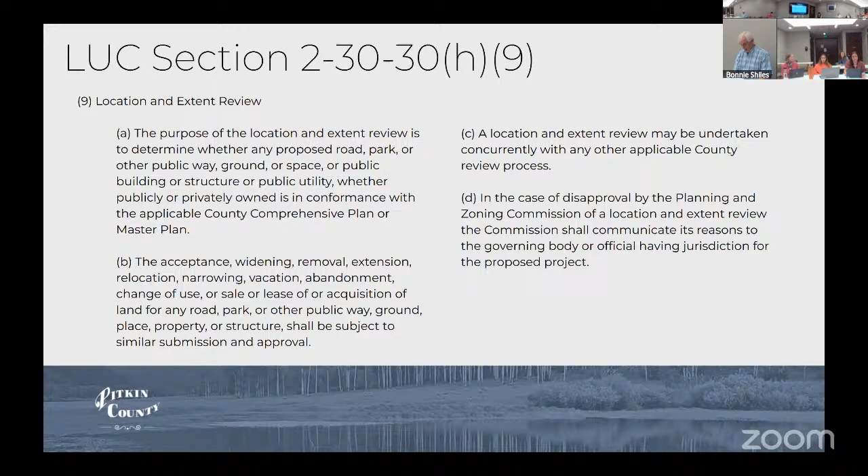The applicable master plan for this case is the Crystal River Valley Master Plan from 2016. The only other thing to note is it is exempt from Chapter 12 of the Land Use Code, areas and activities of state interest, because the applicant is Open Space and Trails in Pitkin County. Looking at the specific code section, 9A, determining whether any proposed road, park, public way, ground, or space is in conformance with the master plan, which is again the 2016 Crystal River Valley Plan.

And then looking at where the parcels of activity are going to be, there's 3 subject parcels. There's the Penny Hot Springs parcel, which is a small parcel encompassing parts of the Riverside, Riverside access and parts of the Hot Springs pools. There's the Filoha Meadows Hot Springs Ranch parcel, which is a very large parcel that partially encompasses the river and some of the pools and then extends out from Highway 133.

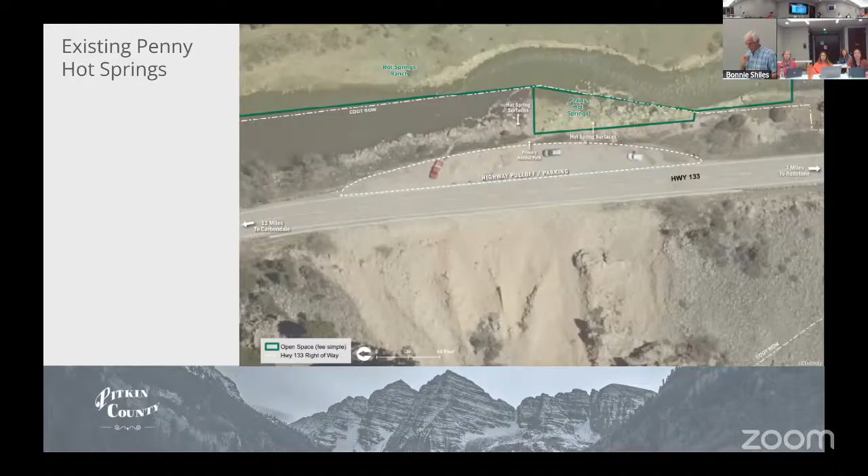And then where a majority of the work is going to be occurring is within a CDOT right of way, which is managed by Pitkin County per a lease agreement. And that contains the parking lot and extends out towards the hot springs a little bit, which we'll look at. So this is the existing Penny Hot Springs. You can see that is the small Penny Hot Springs parcel containing the pools and some of the access.

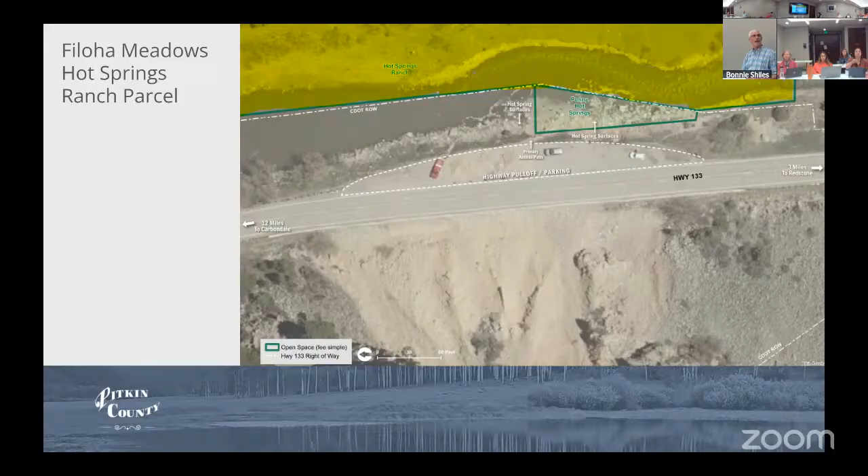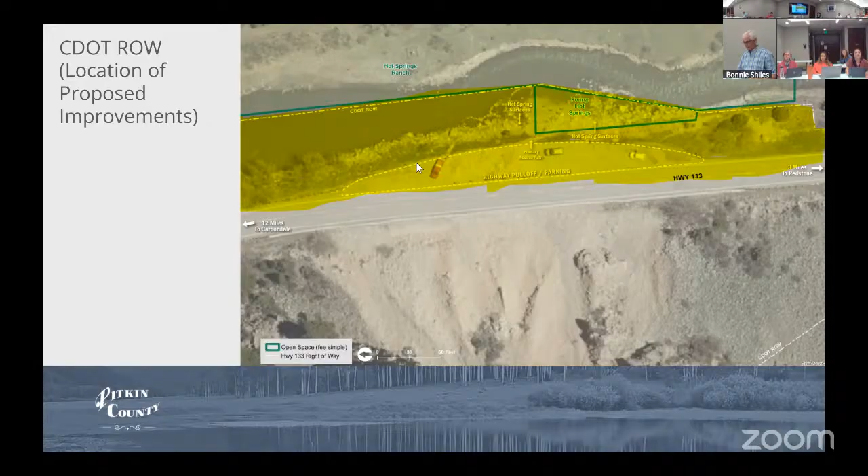This is the part of the Filoha Meadows Hot Springs Ranch parcel. And then it continues to extend out from Highway 133 into that open space. And then the CDOT right of way depicted here is where all of the work is going to be occurring. And you can see that that contains the parking and extends out from there. I'm going to give a brief project summary and then go into the compliance with the master plan, but a majority of the design Carly will cover.

So looking at this project, it is parking, drainage, and access. So the existing parking lot is going to be realigned and resurfaced, retaining about the same parking spaces, 19 out of 21 existing spaces. And then the edge is also going to be set back from the top of the slope with a split rail fence and vegetation. And you can kind of see, with my mouse up here, that's looking up at the current top of slope from the hot springs pools. So the parking is going to be pulled back off of where it's kind of eroding away from the edge right there.

There's 2 existing public access trails that are going to be improved. Measures are going to be taken around these paths and around the eroding slope of the riverside to control the erosion that's happening there, that you can also kind of see in that photo. And then this also does show an existing trail that has come through either erosion or use over time, and all of these existing social trails that aren't formally maintained will be revegetated. And then there's also a planned curb and gutter that's going to direct stormwater runoff and allow for water infiltration prior to meeting the Crystal River, and all native vegetation will be preserved where feasible.

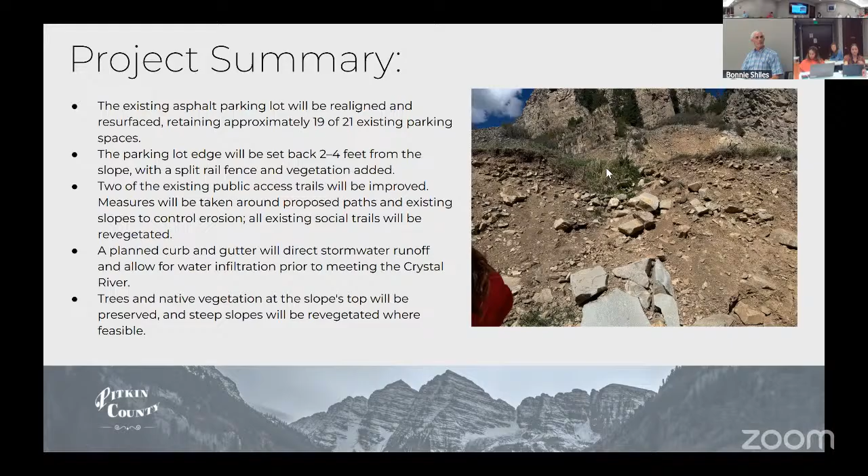So kind of looking at what that'll look like, which Carly will dive into, just to give you an idea. You can see these are the 2 paths right here. This is the curb and gutter that I was referring to that would let out into the river right here. And then the parking lot changes right here. But Carly will dive into that deeper.

So getting into staff analysis relating to the Crystal River Valley Master Plan. This master plan contains primarily core values, goals, and strategies that match up with the values. So to start out, this is pulled from the introduction, stating the overall goal of the plan. It states that the valley is first and foremost a place where preservation of the natural environment and the protection of rural character is valued. And specifically, they call out down here that they value the preservation of open space, wildlife habitat, the Highway 133 scenic corridor, and water quality in the Crystal River Valley.

And then going into some of the goals and strategies that the project aligns with. This is pulled from section 5, environment and open space. There's a goal for future development projects to be sensitive to the unique landscape, physical features, and view sheds that define the Crystal River Valley. And then the promotion of environmental ethic, protecting wildlife habitat, air, and water quality. Looking at the project itself, improvements, specifically the access trails, are going to be form fit to the existing topography in order to minimize disturbance of that already eroding and unstable slope side.

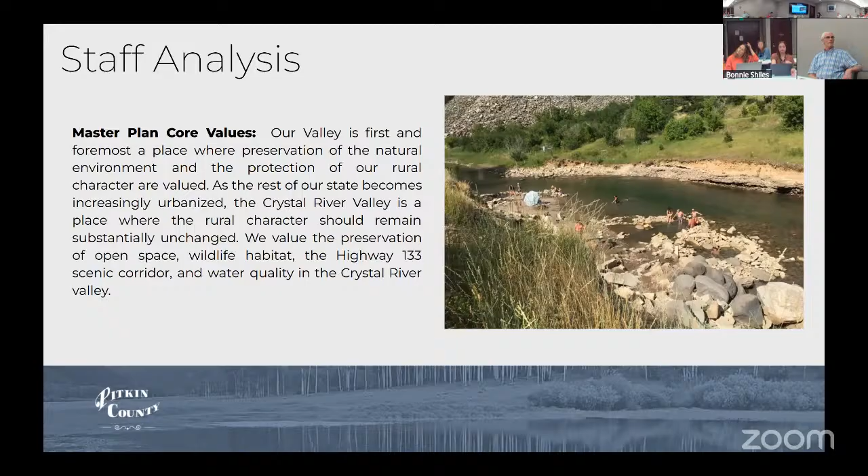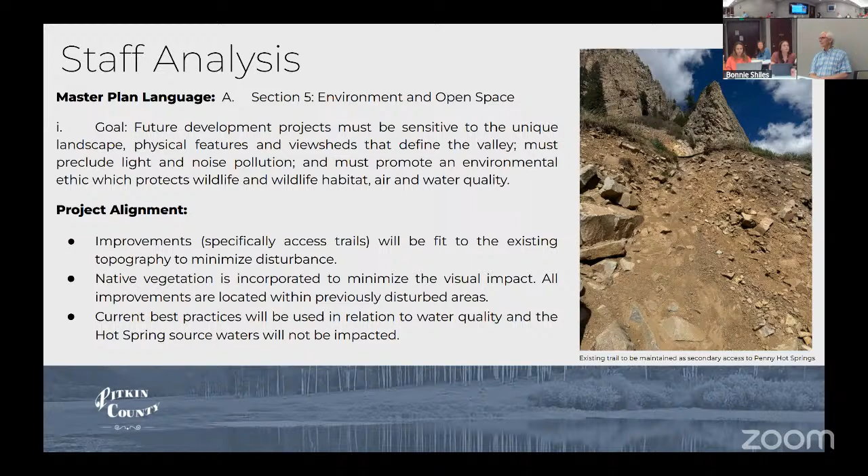Native vegetation is incorporated to minimize the visual impact both from Highway 133 and from the hot springs pools themselves. And then as you saw in this imagery, all of the proposed improvements are within a previously disturbed footprint around Penny Hot Springs. And then current best practices are going to be used in relation to water quality and hot spring source waters. I believe the hot spring source waters have been surveyed, and those will be avoided in terms of machinery and things like that.

But this project does focus on the protection and preservation of the Penny Hot Springs itself while enhancing the safe access for the passive recreational use that it does serve already. And then looking at the balance of environmental protection with that, the drainage improvements are gonna decrease runoff over the current parking lot. Currently, there's no drainage improvements in the area, so water runs off from the parking lot directly down into the pools. So this will hopefully have a positive impact on both the erosion and the water quality of those pools, and balances the need for environmental protection and the preservation of this compatible public use.

And then from the master plan again, section 5 talks about recreation, objectives, and implementing measures. And one of the measures they have is to preserve access to recreational areas that meet the needs of the Crystal River Valley planning area. And so I kind of called out the 2 formalized safe access trails that will preserve use to the area while hopefully having a positive impact on the slope and not further damaging that aspect of things.

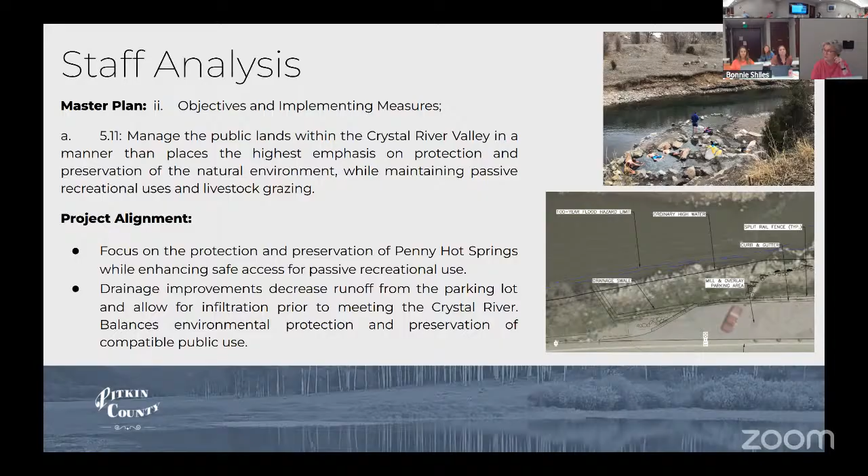Thank you, John. See.

And then looking again at the master plan, section 7 talks about transportation objectives and implementing measures, and we pulled the need to identify specific locations and options for improving pedestrian safety and highway improvements within the Crystal River Valley planning area. And so this is a photo that kind of shows you as well how close the parking lot goes to the edge currently and where that would be taken back from the top of slope. And that really does prioritize user safety with the adequate backup space provided and the increased setback from top of slope with the split rail fence and vegetation installed there.

And then last of this, I'm sorry. I think it's just easier if I jump in with the picture you just had up. Yeah, go ahead. Can you go back to the prior slide, please? Okay, yes, this one. Yeah. One of my concerns was whether the cars will have to back out into the 133 corridor when they're backing out, if the rail is placed further from the edge.

And I noticed in that picture, I think that's a Pitkin County vehicle, one of y'all's when you wanted to take this picture. And the way you parked was slanted, which is the way I parked when I went out there too, so that I wouldn't have to back straight out. But currently I have the parking straight out. I just want to look after the commingling of backing out into pretty high-speed traffic.

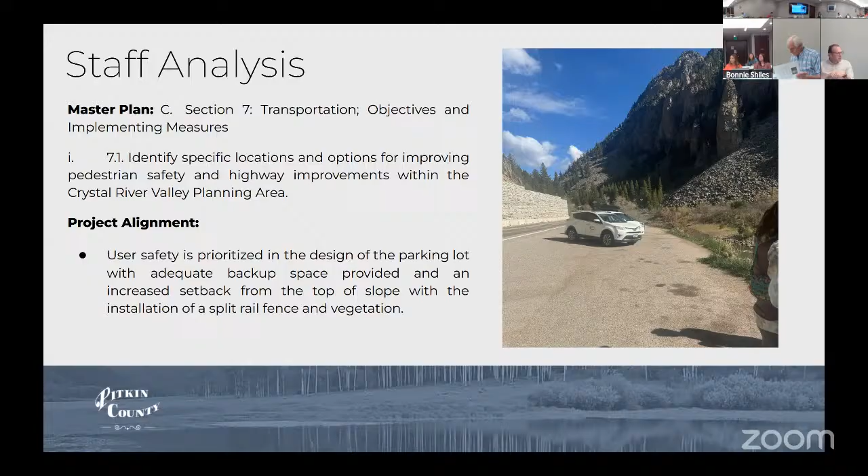Mhm. It's downgraded to 45 through there, but I've seen people just, they want to either get out or they want to get home, and that's a place they can go pretty fast through. And there's some curves. I can touch on that in the slides that I have. Thank you. Perfect.

And then looking at the referral comments that we got on this project, we received 6 comments from the zoning officer, planning engineer, public works engineer, Healthy Rivers and Streams, Colorado Geological Survey, and Carbondale Rural Fire Protection District. They're all included in the packet, but I'm gonna touch on the ones that resulted in something in the reso, and then I think Carly's also gonna touch on some of the other referral comments.

But from the county engineer, we have the requirement of a floodplain permit and statement of no rise, which I believe Open Space and Trails has ready to provide, and then also documentation of permits and/or permission from CDOT for all of the work that's gonna be occurring in the right of way.

And then from Colorado Geological Survey, they called for a site-specific geologic hazard evaluation to assess slope stability, stream bank conditions, subsurface characteristics, and the potential effects of construction on the hillside and river corridor. So that has been included as a condition of approval in the resolution.

And then something to call out here as well, the letter of no rise with supporting modeling is not currently included in the resolution, but it will be added to the resolution.

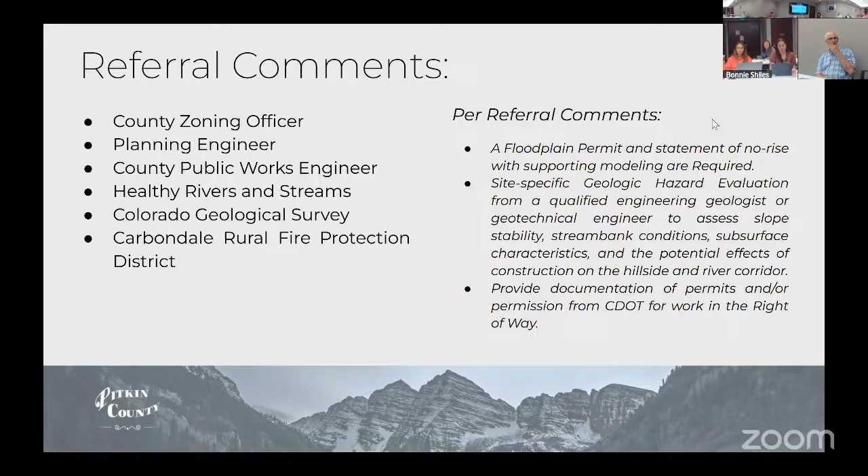And with that, staff recommends the Planning and Zoning Commission find that location and extent review for Penny Hot Springs parking, drainage, and access improvements is in conformance with the objectives of the 2016 Crystal River Valley Master Plan, subject to the draft resolution. Thank you.

Great. Thank you, Rebecca. Carly? All right, let me share my screen here. I have a question. Can I start with my questions?

Yeah. The referral comment from Colorado Geological Survey that requires an evaluation, how will you handle the response of their evaluation if it hasn't been done yet? Like, what is the process for them giving feedback from a full evaluation and further research and then incorporating that into this plan that we're looking at now? That is a question that I have.

Hello, I'm Carly O'Connell. I work over in Pitkin County Open Space and Trails. I'm the landscape architect and planner there, so I've been managing this project. Again, my landscape architecture title precludes me from designing walls or slope stability analyses, but from the outset, we have worked with our engineer on that question, and it was determined that a slope stability analysis was not needed for this project. So we did not pursue one.

And I think, as Carly said, if there's a further investigation related to stability that turns this into something other than this, the first place for that to go is back to the open space board to determine if it's even a project they're going to pursue. This kind of lays the framework by going through the L&E that allows them to go forward with the further investigations that would lead to permitting. And that remains to be seen where that might all head once they've gotten through those steps.

So in a way, there's a lot of detail and engineering that's been done. But as with a lot of our other projects, if this was a site plan project, there are additional things that will be done with more detail at permit, and maybe at that point it changes what this is and we'll have another conversation, or maybe it comes off the table. So we would be approving it conditional to that kind of study being done. Is that right? Right.

Yes, and we're not opposed to doing that study. It just hasn't been recommended so far by the consultant team that the county has hired. And I think as we talk through some of the pieces, maybe that will become more clear.

Excuse me. I know that it said that you won't be touching the river pools themselves. But is it close enough, or is there some necessity that the Corps of Engineers would get involved? Yes, because of the way the river flows. Okay. Got it.

If I can just back up a second, I just want to remind everybody of all of the public process that we have done to this point that has led to the plan that we're showing you. So in 2020, we did a management plan.

And the biggest concerns that came out of that management plan outreach were safety, accessibility, and user behavior at the hot springs. And so, one of the main management actions in that plan was to pursue stabilization improvements and improvements to the pullout. So the management plan directed Open Space and Trails staff to pursue that.

So in 2021, we worked with CDOT so that we could secure a lease agreement in order to pursue some of those improvements. As you saw, we don't own all of the collection of parcels that make up what we know of as Penny Hot Springs. So once that was secured, we began schematic design with SGM engineers, and we worked with CDOT on their reviews, reviewing comments on that.

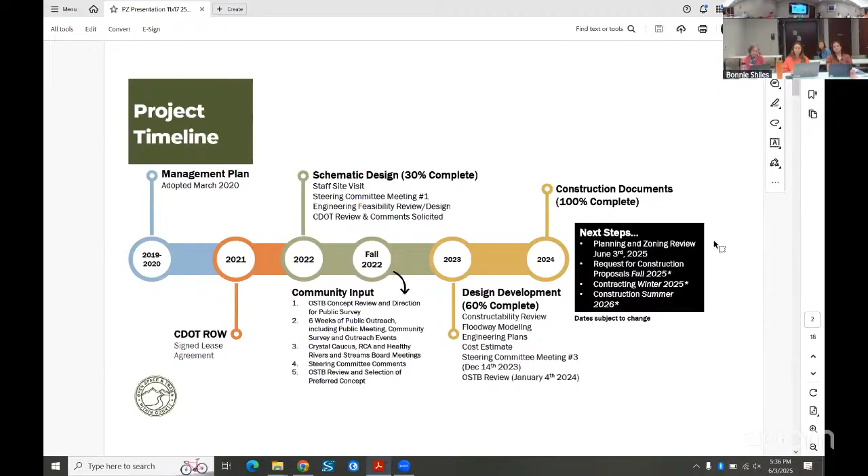We would pursue permits and, of course, any additional information that comes out of this meeting for those permits. And then potential construction in summer 2026, though, again, I want to emphasize the date is subject to change. Open Space and Trails, I'm sure you've seen, has acquired many properties recently, and some of those properties may take precedence over this project.

So the vision initially from the outreach with community members in the 2020 management plan set these design principles: that Penny should remain this natural and undeveloped experience. It should be accessible, meaning free. It should remain scenic and peaceful. It should provide connections to wildlife and nature and honor this community spirit. Those pools, Open Space and Trails does nothing to create those. There are designated leaders or pool managers that go out there and move those rocks around.

Who designates those people, do they? I am unaware, and I have tried not to. That's fine. Yeah, yeah. But there are self-proclaimed mayors of Penny Hot Springs.

It is a place that has a long history. Prior to what we know it as today, it was a train stop. So the train would stop there. There was a concrete bathhouse in the Filoha Meadows area. So people would get off, enjoy the hot springs, and then as the 70s came, people took off their clothes and would bathe in the area. So then some of the locals poured concrete on all of the hot springs. And the hot springs came back, so they're pretty resilient.

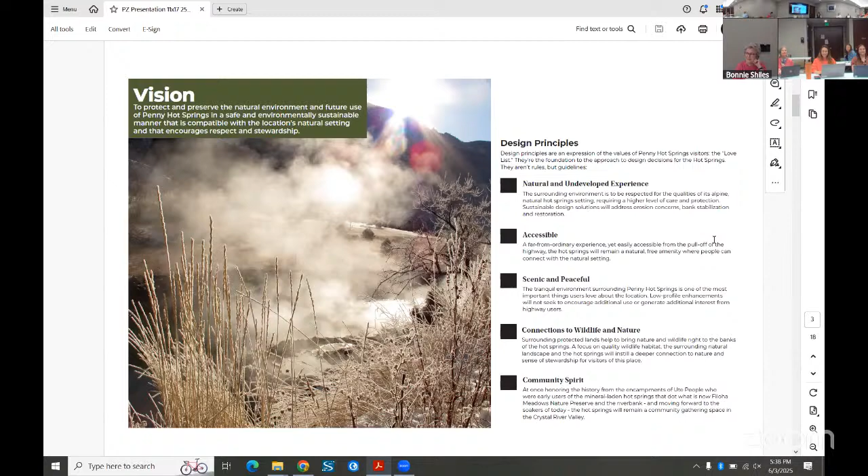I'd forgotten that. Yeah. Goodness. Yeah. You forgot you were there? Forgot what I was wearing.

It's got a storied history, and I think that we don't want to lose that. We heard loud and clear that this should not become another Iron Mountain Hot Springs. This is Penny Hot Springs. It is different. Okay, so into the site analysis, we have seen as many as 40 people on busy days on the riverbank. And users represent a range in age from the folks that were there when they saw the concrete get poured over the hot spring sources, to many young families with kids.

The parking can be a mess. So here is just a day out there. There's a cooler in the highway in this photo. Access can get pretty treacherous in the winter. And even in the summer, able-bodied folks like myself and Rebecca, we were out there climbing around. It's not easy to get down to. The elevation drops approximately 20 feet from the parking area to the hot spring sources, in a pretty sheer 1-to-1, 2-to-1 slope.

The hot springs, as we mentioned, have all been surveyed, so we have those sources located. In this photo, that's that asphalt. So again, as CDOT has extra chip seal asphalt, they've just put it out here, and their perspective is, let's just make it as big as the shoulder is. So they've just pushed asphalt.

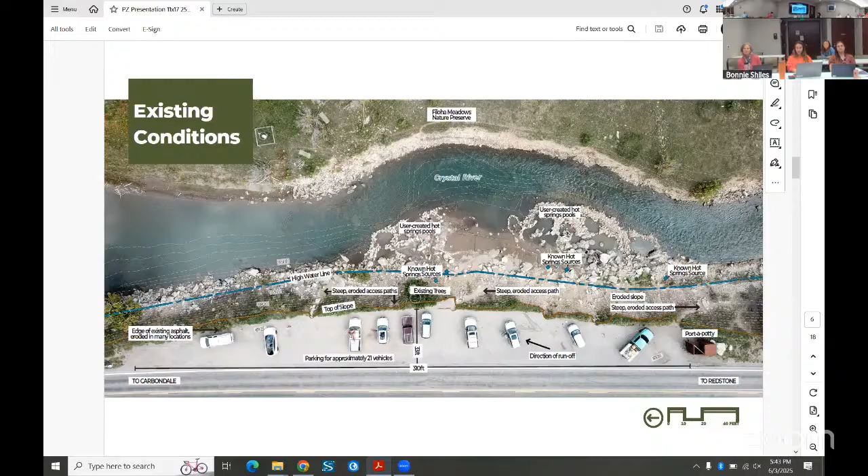So a typical parking spot is anywhere between 18 to 20 feet, and then you should provide about 8 feet of backup space. So in this location, head-in parking would be safe, but it's not a consistent distance. So over here, you drop to about 28 feet, and over in this location, I think 27 feet. So there's a little bit of the location as it is today.

So when we started this project, we tested a number of solutions. The first being what if we just improved the trails? The second was what if we provided head-in parking? And the third is angled parking, and this line right here is a raised barrier so that you could have a defined point of ingress and egress.

You can start to see that this option took the 21 parking spaces down to about 9 spaces, created these very large areas where no parking would be allowed because turning movements would have to be accommodated. And our ranger saw that and flagged that and said, people are gonna park there no matter what. So you would basically create a situation where no one could get in or out of a parking area that we created. It was determined that this option was not feasible.

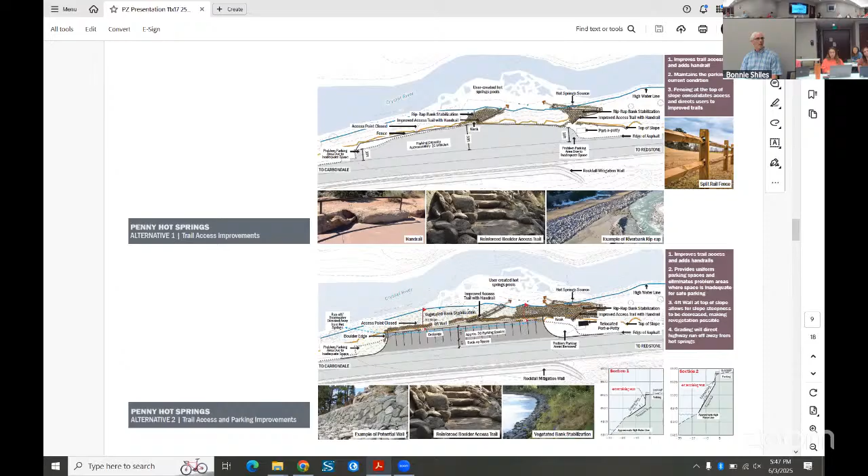And what we learned is the community wanted to see a hybrid of these. So, no head-in parking spaces, just sort of keep the ability for users to pull in at an angle, whichever angle they're coming from, so they can back out in the angle that they want to leave from, so that you're not creating a situation where everyone must park in the same configuration. This allows for some flexibility with oversized vehicles and trailers. And so a hybrid of these 2 led to the preferred alternative.

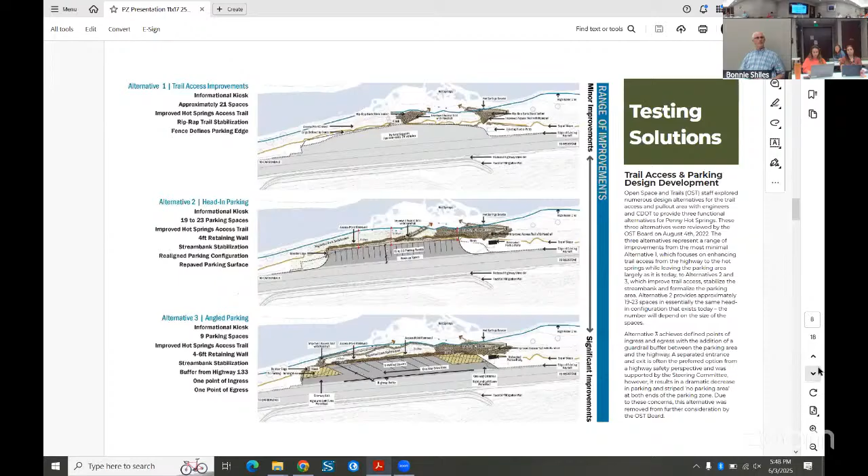So let's get into this plan. So here it is. That parking edge is pulled back about 2 to 3 feet from this point. It varies in width, but the whole parking platform is taken from the edge of the slope and pulled back so that we can install that fence, get vegetation to grow, and put in that curb and gutter to direct water into the Crystal River in one location so that we can maximize that filtration of the water before it enters the river.

The slopes in between 2 access points really remain untouched. So again, I think that is one of the reasons that led to our engineer determining that the slope stability study was not needed, because the 2 access points that we are improving are the 2 access points that are existing. And then there's 3 others that would be closed. There's one closed over here, another closed that goes straight down, and then another closed right here.

So these paths already exist. What is contemplated is putting some stones to create steps and anchoring them in with some boulders. So it's a really low touch improvement on this steep slope in those areas. I don't want to repeat what Rebecca said here, but I want to pause for any questions that we might not have covered on this, or remind me if there were ones I said I was going to cover.

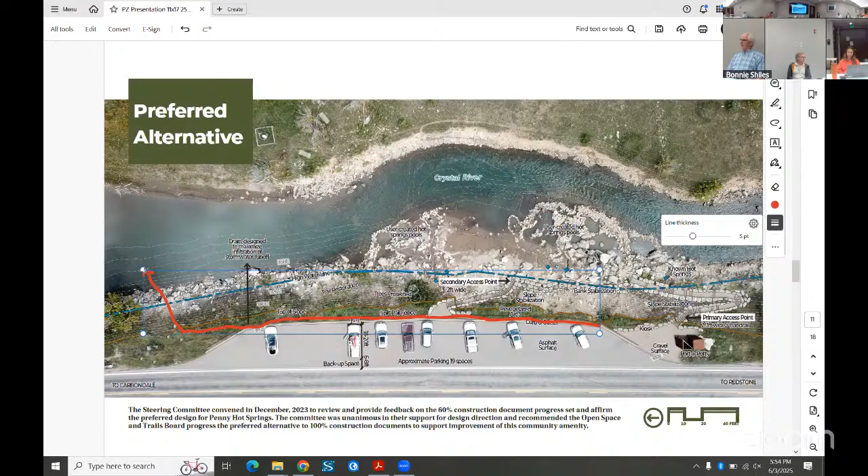Is there consideration of putting the porta potty inside the curb so that leakage would follow the same route? We hadn't considered that. There haven't been any leakage concerns with the porta potty. However, after installing the porta potty, the number of human waste locations that we have found has significantly decreased. The other reason I ask is we had one or two porta potties set on fire at Spring Gulch this season due to vandals. Really? I was on maternity leave. Just wouldn't want the poop to go into the hot springs area.

Yeah. This one has stayed. It was a contentious thing at first, but people have come to appreciate that it is there. You are on the state highway at that point, you're a little more visible than up at Spring Gulch. Yeah, but high school kids will be high school kids, right? So it was pretty disruptive this year. I answered your question on the backup space.

Another thing I'll add, the Crystal River Caucus's chief concern with this site continues to be highway safety. We have pulled traffic accident data from CDOT. There have been about 4 accidents in the last 10 years in this stretch of highway, and all 4 of them have been the result of rock fall. Behind this site there's that massive rock fall mitigation wall, so that may solve those rock fall safety concerns with vehicles. There have not been reported accidents in CDOT's reports from users in this location.

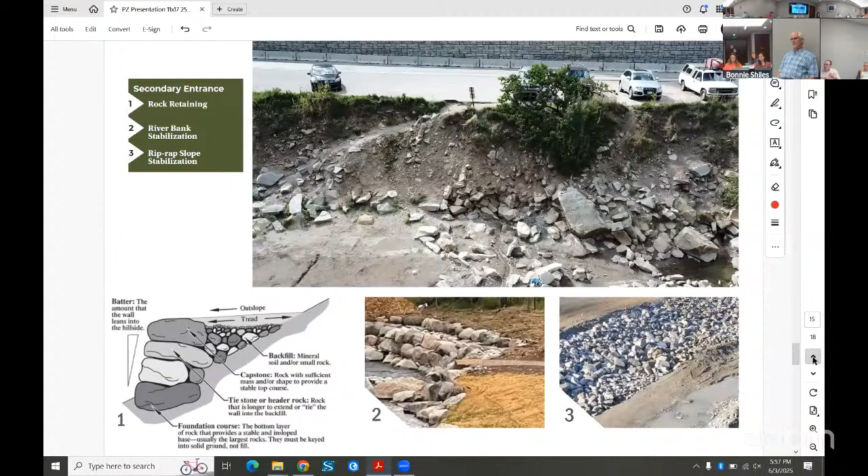The two questions I had: is there a requirement for ADA access? And secondly, what about winter maintenance? Because we build it, we own it. Would we have somebody removing snow or making sure there's not ice buildup on those steps? We would not. This is a trail, so it would essentially operate as all of our other open space trails, which are natural surface trails not maintained in the winter. That being said, our hot spring super users may take it upon themselves to maintain it a little better.

So this would still be soft surface? It would be a mixture of, you can see here, these stone steps. So there would be stone steps whenever there is a step, and then there'd be a soft surface stretch. So this is sort of the section of what the trail would look like as it comes down. And again, it just comes down this way.

And so, you know, ADA access is not required for trails in open spaces. We do want to provide a small section of handrail next to the trail. In order to provide an ADA ramp from the 20-foot drop would turn this into an entirely different experience. It wouldn't be a slide. Well, we would maintain it, so if it was a paved ramp, we would then maintain it, but it would require such significant retaining walls to create, which is just outside of the realm of the interests of the community members.

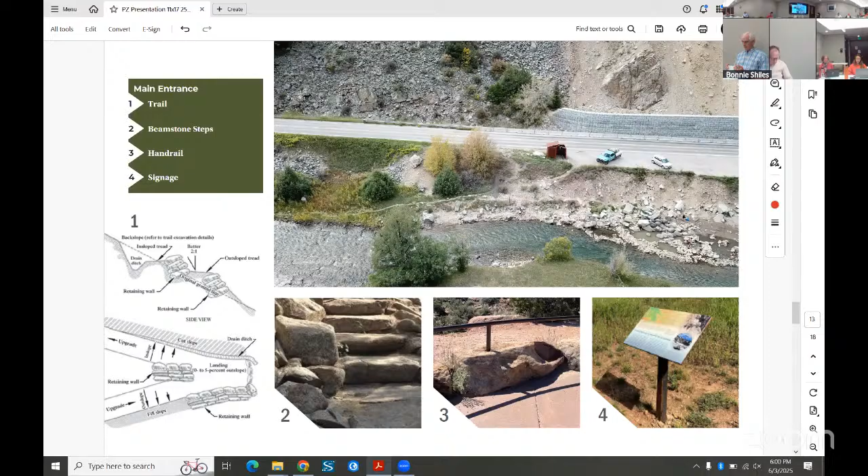Yes, thank you again. For some reason, reviewing the presentation, I didn't get that it was staying soft surface, not being paved. Yeah, if it was paved, we would certainly have some winter maintenance. So CDOT would still plow as they do now. So those plow spoils would be pushed to one side of the parking lot or another. But so the parking lot would be maintained. That's all I have in here for slides.

Anything else from the commission members? Okay, I'll close the public hearing. Does someone want to make a motion or have any further discussion? I'll move to approve the resolution as presented. Okay, we have a motion by Doug. Do we have a second to that motion? Second. Joe. All right, I'll take a vote then. All in favor, signify by saying aye. Aye. All opposed? None, so the motion passes 5-0.

Thank you. Again, can't give you an exact date of when we would pursue construction. Obviously, there's a permitting process to go through, but we're looking forward to improving this public amenity. Well, thanks. That's a great presentation and obviously a lot of work that's been done leading up to this.

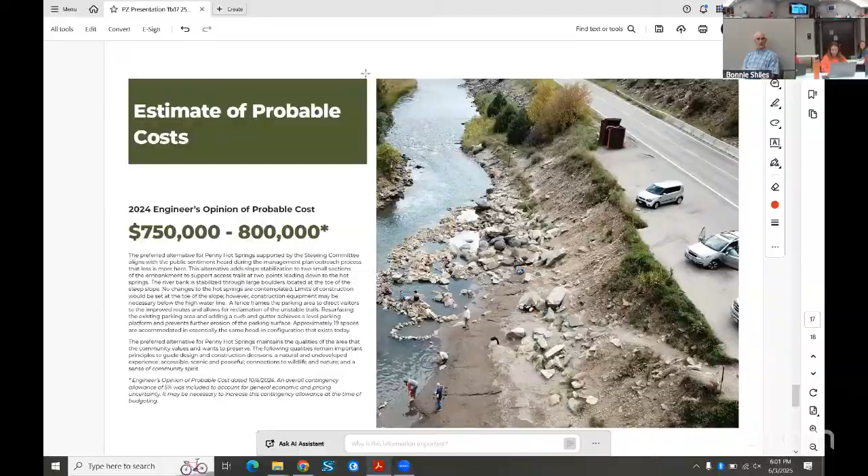I did think of two things to add that have nothing to do with this project, if you're ready for those. Oh, sure. One is that Hannah Hunt had her baby. She did. Welcome to Wayne Wander. I can't remember his middle name. But yes, Wayne Wander, I think May 28th.

And your next meeting dates do not show June 17th, when we are planning to have a comp plan discussion, so keep that one on your calendar. That's not a joint meeting? No, not the June meeting. And then right now, tentatively, we figured nobody wanted a meeting on the 1st of July, so we're looking at July 15th. I may have that resource government zoning for you. That's sort of tentative right now. July 22nd was the proposed joint meeting, which is shifting. We still want to hold that date, but we're rethinking whether that's going to be a joint meeting with the BOCC or something, but we will keep that on your docket. So the two meeting dates for July would be the 15th and the 22nd.

Can you briefly speak to the rezoning of the government lands? The board has directed us to look at rezoning public lands, Forest Service, BLM, state lands, to the resource government zone district that exists in the code, but it has never been applied anywhere in the county. So we're just starting to look at that. Mostly right now, GIS has been working on the mapping that would go along with that, and then to bring forward a rezoning to the P&Z and the BOCC for any of those public lands in the county, excluding ski rec, which is largely public lands but has already gone through a master planning process for those properties. What's the concept? Do we have any authority with respect to that?